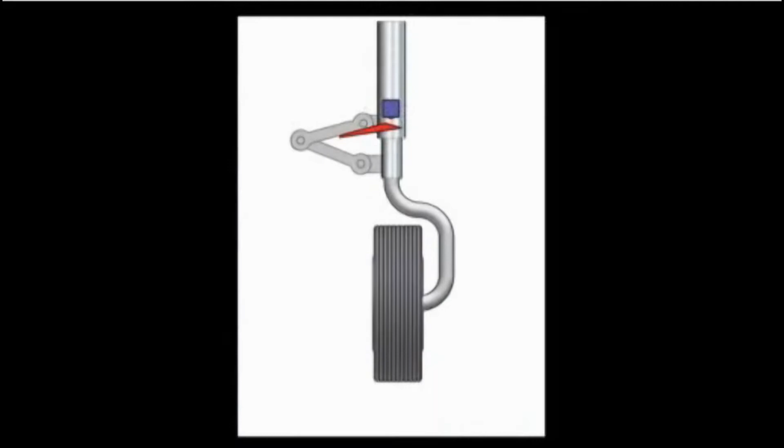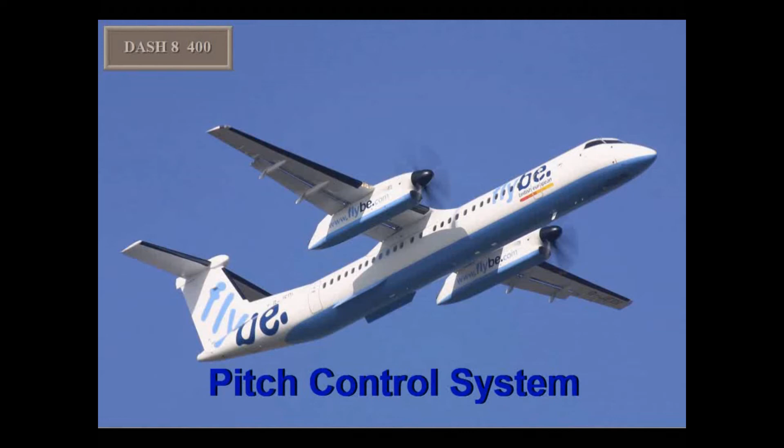Pitch movement comes entirely from two independent elevator surfaces, controlled by cables linked to fore and aft movement of the control columns. If the autopilot is engaged, it controls the left elevator movement.

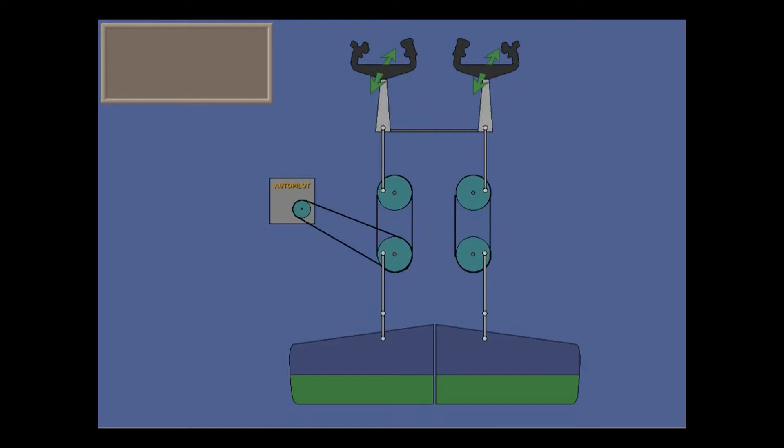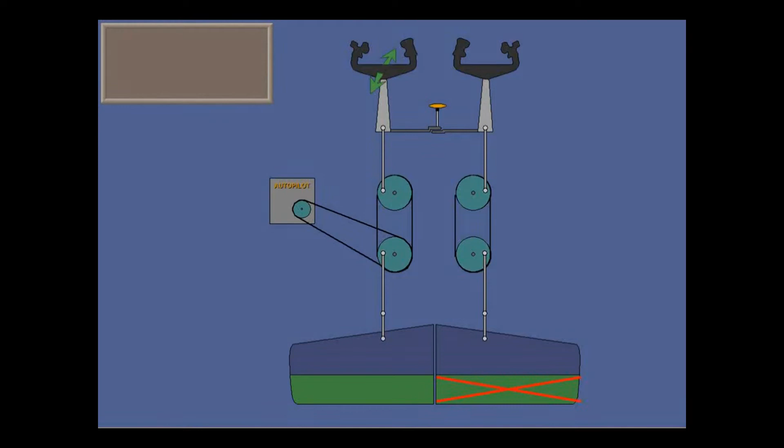A manual disconnect feature is installed to separate the elevators if one of them is jammed. Pulling and rotating the pitch disconnect handle isolates the jammed side. When disconnected, the free column operates the free operating elevator.

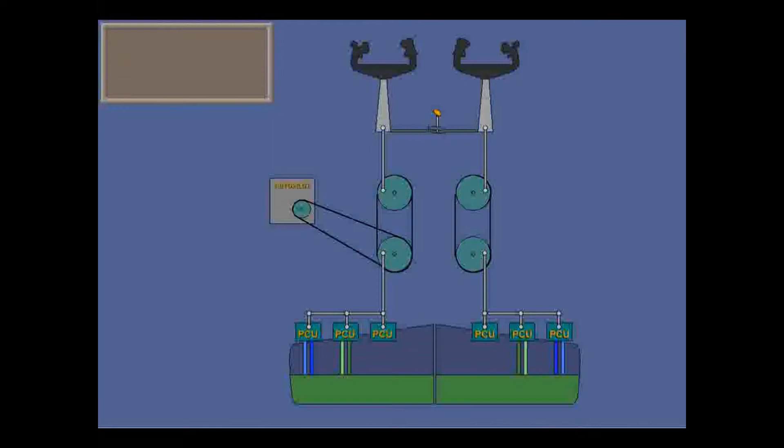There are three identical hydraulic PCUs for each elevator. Hydraulic System 1 powers the left and right outboard PCUs. The number 2 hydraulic system powers the center PCUs, and the number 3 hydraulic system powers the standby inboard system.

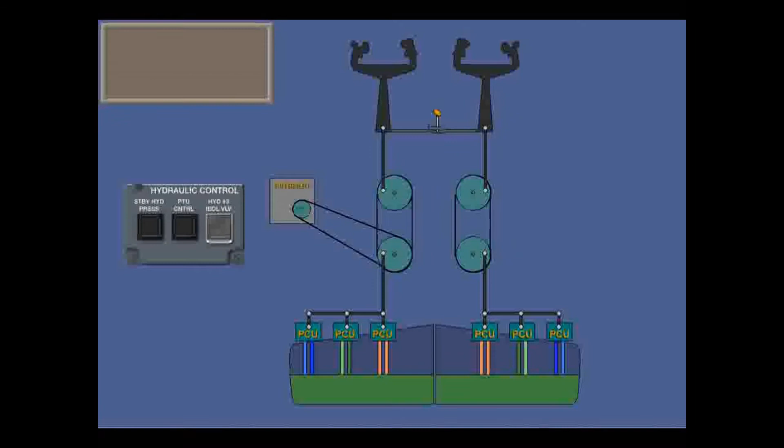The number 3 hydraulic valve will automatically activate if there's a failure in either number 1 or number 2 hydraulic system, or both hydraulic systems. You can also manually activate the valve by pushing the hydraulic isolation valve push button on the hydraulic control panel. This will cause the elevator pressure caution light to come on if both main hydraulic systems are functioning.

There are two pitch, feel and trim units, PFTUs, installed on the vertical stabilizer. These provide artificial feel to the left and right control columns and trimming to the elevators. There are also centering springs in the PFTUs that return the elevators to neutral.

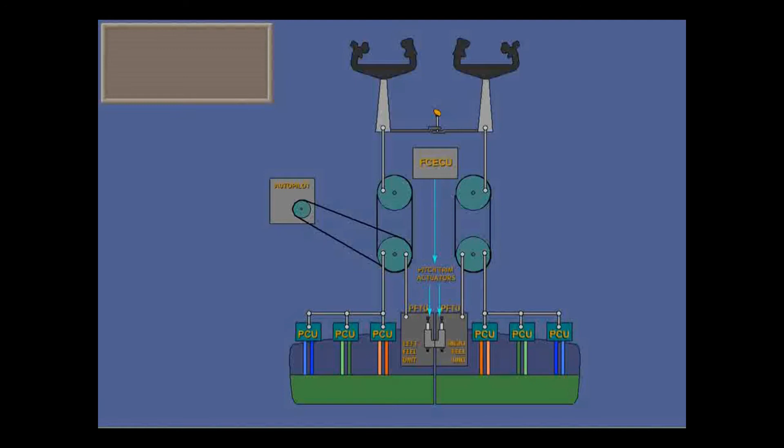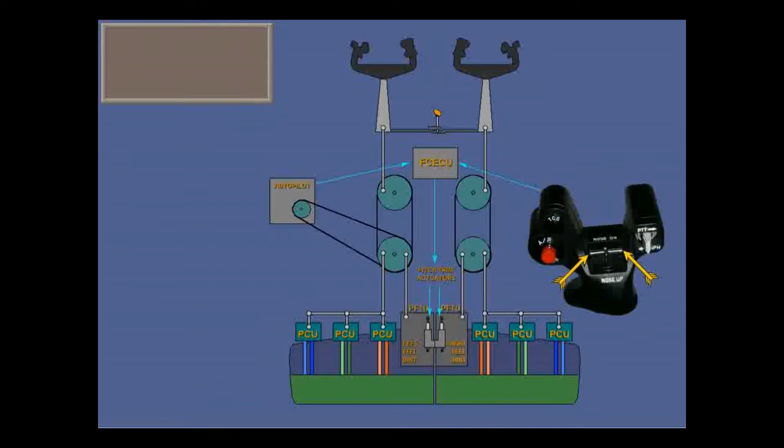Trimming is through left and right pitch trim actuators controlled by the FCECU. Inputs to the FCECU can be either automatic from the autopilot or manual using these switches on the control column. The trim switches are self-centering.

The elevator trim shut-off switch light on the glare shield will come on and an aural warning will sound if the trim switches are operated in either direction for more than 3 seconds. The aural warning will stop and the light go out if you release the trim switches.

The elevator trim shut-off switch light also goes off if you push the switch light. Pushing the switch light deactivates elevator trim.

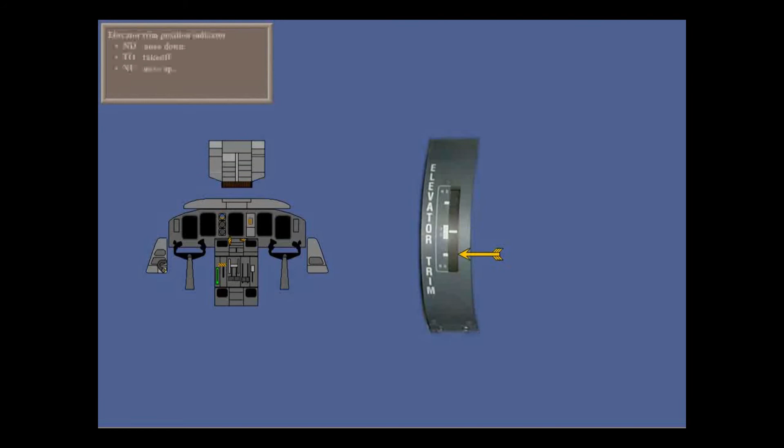There are 4 caution lights associated with the elevators. The pitch trim light comes on if the FCECU can't control or command its pitch trim actuator, if trim input commands disagree, or if there is an IAS mismatch. In this case, you get an IAS mismatch message on the PFD, and rudder control, spoiler outboard, and elevator feel caution lights will also illuminate.

The elevator feel caution illuminates if the FCECU can't control or command its pitch feel actuator, or there is an IAS mismatch. As before, this causes other cautions.

Elevator asymmetry comes on when the FCECU detects a left and right elevator mismatch. Finally, elevator pressure illuminates if numbers 1, 2 and 3 hydraulic systems aren't supplying pressure to the elevators.